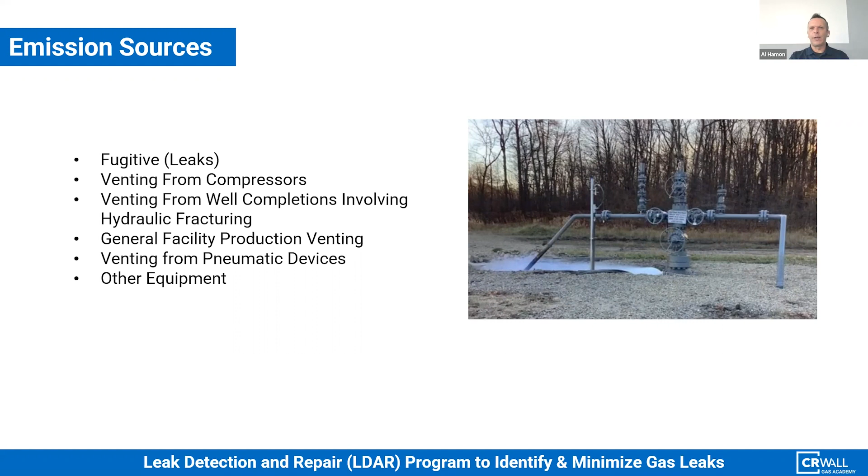Some common sources of fugitive emissions include compressor unit valves, relief valves, unit blowdowns, compressor packing, meter tubes, valve stems and fittings, fuel valves, various piping and vessel flanges, threaded connections, online gas analyzers, and pipeline damage.

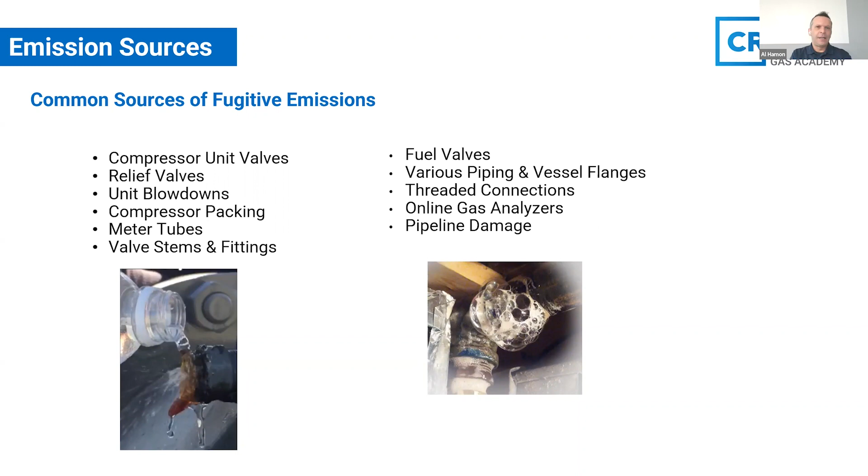What are some major causes of gas leakage? Corrosion, construction material defect, third-party damage, human error, or mechanical failure.

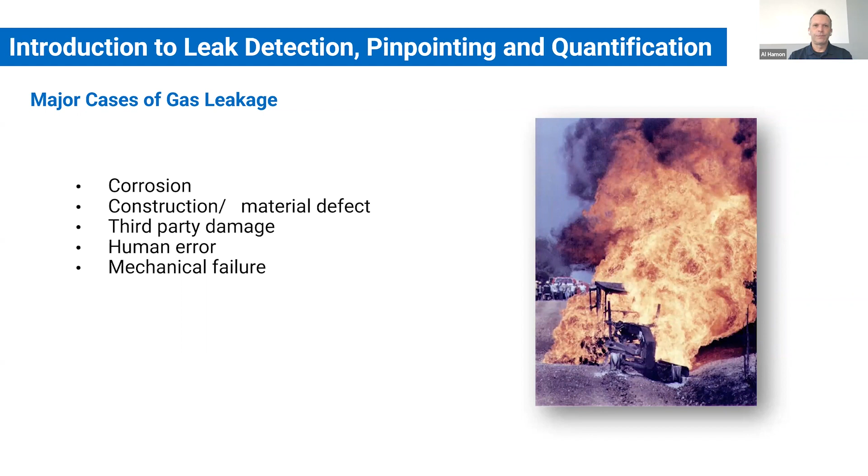What is the definition of leak detection, pinpointing, and quantification? Detection is identifying the existence of a gas leak. Pinpointing is identifying the source of the gas leak, or the actual position of the leak. Quantification is determination of concentration and/or emission rates.

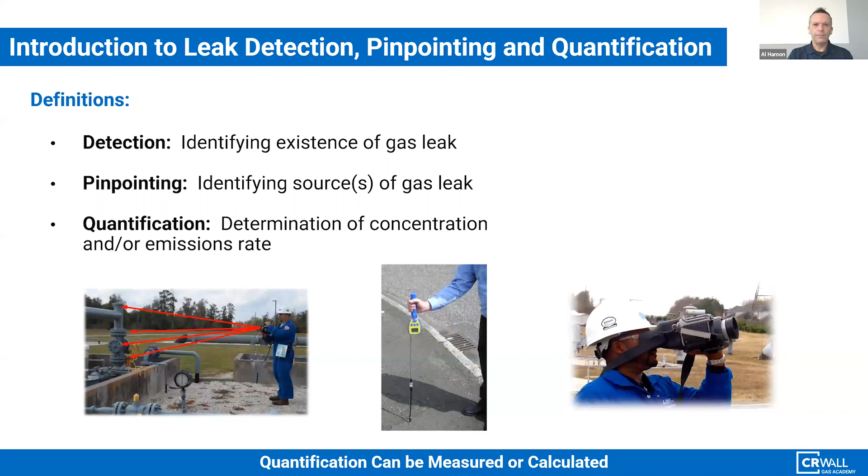What are the reasons for conducting a leak survey? It could be federal and provincial requirements, or industry stakeholders, with many stakeholders driving methods and practices—AGA, CSA Z662, AER Directive 60, EPA Method 21, TSSA, and the list goes on.

Reducing unaccounted for gas, system overview, budgeting funds where needed. Leak classification drives work and investment, reduces operating costs, odor complaints, callouts, and also affects public image.

What are some of the new drivers for leak survey beyond safety? Public image is one, along with third-party environmental oversight, watch groups, and fence line investigations. There's also a focus on corporate environmental, social, and governance goals, improvement in technology, and new regulations and LDAR strategies.

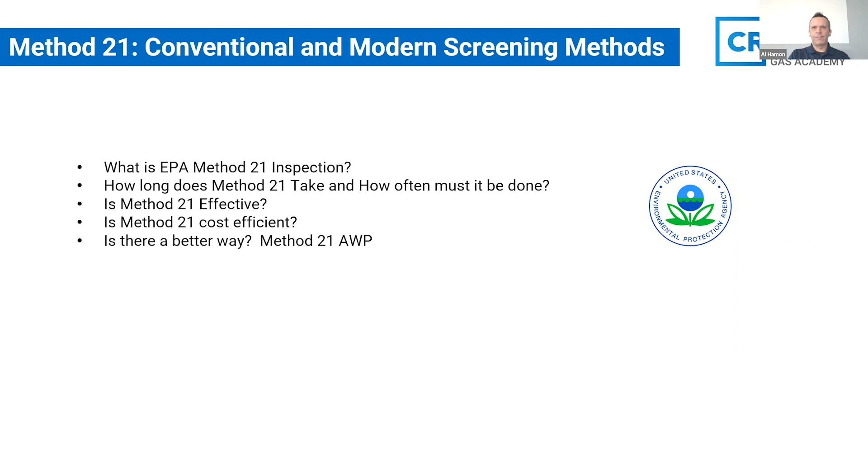So if we look at the two alternatives right now, Method 21: you're using conventional flame ionization or catalytic oxidation, thermal conductivity, and now infrared sensors or infrared controlled interference polarization. With the new Method 21 alternative work practice, AWP, we're adding optical gas imaging cameras, so passive infrared type technology. We're adding illuminated infrared laser detectors or remote methane leak detectors, which is considered active infrared, and spectrometers.

Now we're talking about Method 21. I mean, that's an EPA program, but we're talking about it because why? It drives a lot of practices and work definition here in Canada, correct? Yes. It's pretty much the standard. Method 21 is the standard as far as the type of instruments and the spec around those instruments that are approved, as well as the actual method. There are different guidelines when performing Method 21 that surround different types of leak points and how to approach them.

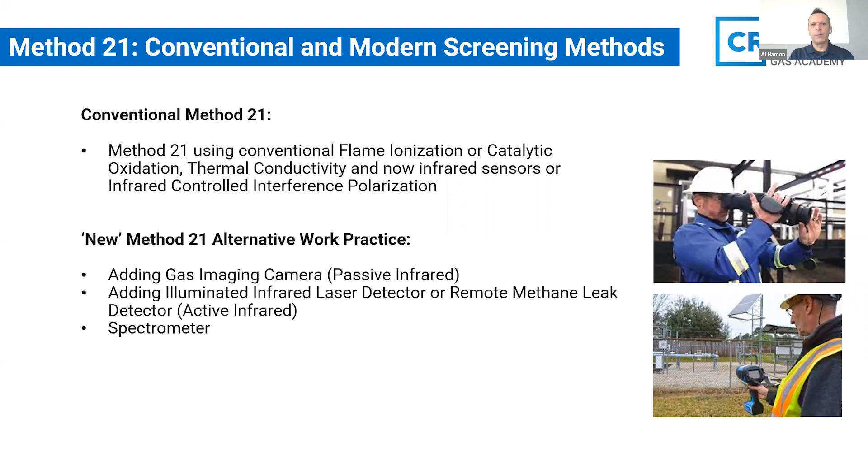Okay, so the main difference, if we look at these two, Method 21 versus an alternative work practice. Conventional Method 21, we'll call it, uses handheld monitors that detect ppm levels of VOC. They'll detect up to 100% gas as well. With the AWP, we're using optical gas imaging to detect a visible image of VOC leaks. This can be done at a remote distance versus conventional equipment where you're actually right at the leak source.

There might be some weather limits for both of them. High rain, wind, and humidity. For cameras, for OGIs, definitely rain, fog, wind, and extreme cold. Probably add snow to that last one as well, correct? Because of the background for the handheld laser devices.

Yes, so for laser devices, exactly, you need a nice reflective surface to get a proper reading with those devices. And as far as leak definition, conventional equipment will measure, they say, 500 to 10,000 ppm. That's a typical range for quantifying leaks, versus the optical gas imaging camera. It's a visual leak detection. So one gives you concentrations and the other gives you potentially emission rates as well, right?

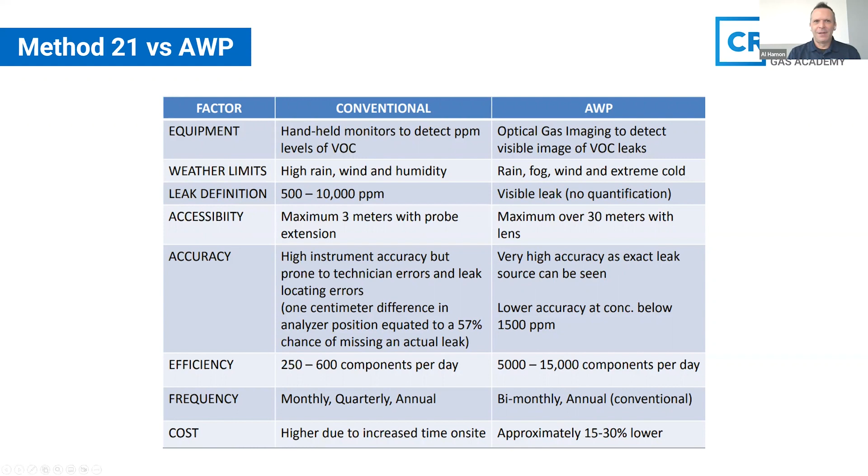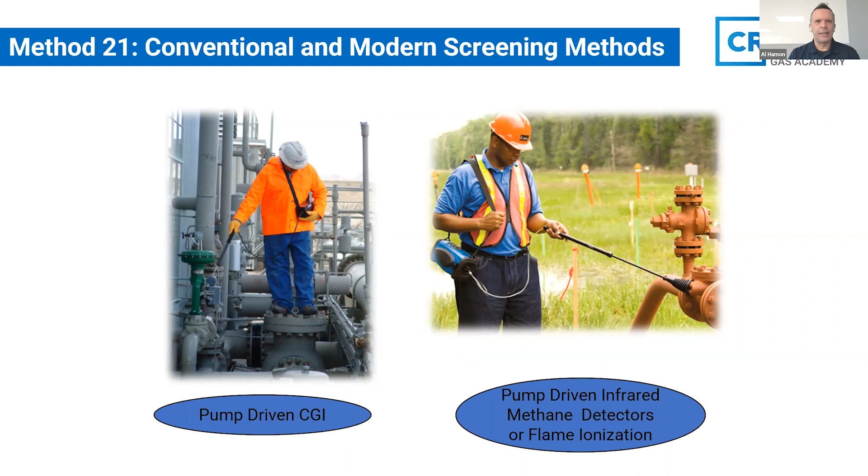So typical instrumentation you'd be using for the conventional method is CGI units, combustible gas indicators, like the GMI gas surveyor, which is a great example, or the DPIR from Heath. Both units have an onboard pump, and you're drawing a sample to verify the actual leak concentration, not the leak rate. Newer technology is the RMLD, laser-based detectors that can take measurements at a distance, as well as OGI instruments, optical gas imaging cameras.

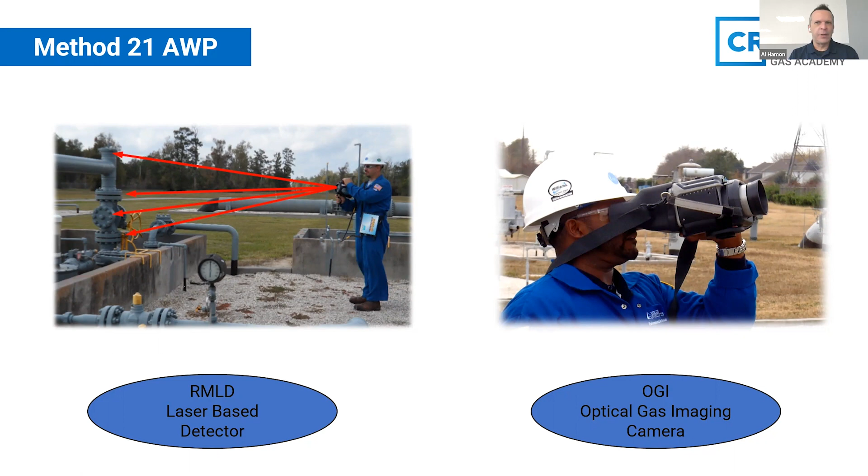So AWP, I don't know if I mentioned that, but its definition is alternative work practice. That's the evolution of the standard or conventional method 21. Yeah, exactly. And for our guests that haven't reviewed it, would encourage you to do so.

So some of the challenges, new approaches, best practices. So gas and leak detection culture, everyone is responsible for fugitive emissions reduction, mitigation, trend to leak quantification, increase focus on opportunistic leak detection versus planned scheduled work, AGA committee recommendations for gas filled occupancy, driving new best practices, and also new technology like optical gas imaging and laser methane detectors, driving new practices and benefits.

I just wanted to add to this, that first point I find quite fascinating. It is a real shift in philosophy or culture or strategy, if you will, around gas detection. We're seeing our customers, like many of you guys that are attending, your companies are now looking at everyone as possible opportunities to capture leak detection information data in the field. So more equipment in the field, more people trained to do so.

So this goes back to that opportunistic versus planned or scheduled work. When your teams are in the field now, even though it's not scheduled, you're doing a quick leak detection on the facilities potentially that you're working with or working on. So we've certainly seen that happen. Is that the same in the US, Roy? Yep. Yes. Okay. Same thing.

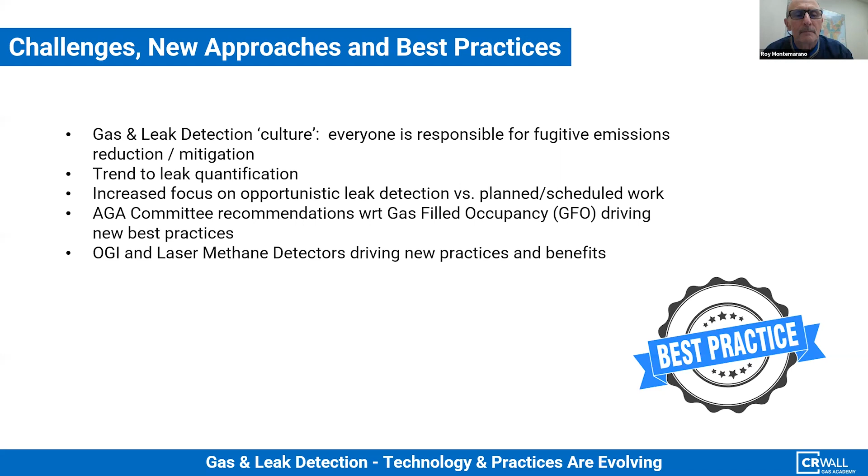You need to take your time. Yep. So for gas filled occupancies, let's talk about emergency response, protecting employees, first responders, and the public. Prepared by the AGA operations section, Safety and Occupational Health Committee. August 2022 was the latest revision. Recommendations above and beyond existing regulations. Committee identified 78 fatalities from GFO explosions.

Recommendations include use of handheld laser methane detection instrumentation to determine areas of exclusion before entering a structure, and new committee formed to evaluate all tech, including optical gas imaging. So as it was explained to me in very simple terms, field technicians, customer service operations personnel are now doing a remote scan using OGI or laser handheld devices of the facility's envelope, various leak points, windows,

looking for evidence of methane there before entering the building, because a lot of the standard practice is walking up to Madame's house and ringing the doorbell and going in that way. Now there's a preliminary scan, and that's the recommendation that looks like they're coming. And will be widely adopted, we expect. That's what we're hearing. Yep, especially first responders. It's the rule of thumb moving forward, right?

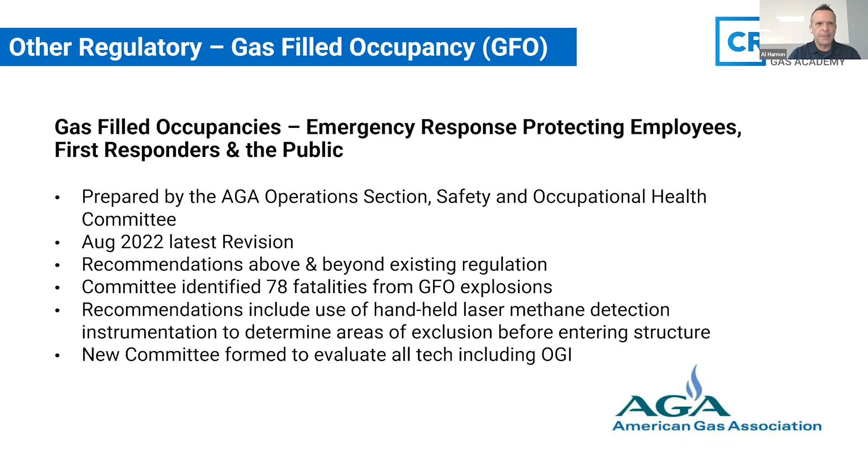So they're investing in these laser-based type technology to be able to verify areas before entering, or even before approaching closer to that specific area. So yes, we're seeing this increase now in the United States also, with the increase of laser detection to perform this particular function. Yes. Yeah.

So some of the approaches or technology that's readily available in the market right now. So again, your typical CGI combustible gas indicators. Some of you already use these. For example, the GMI 500 series first responders, GMI GS 700s, also high flow samplers, as line remote, line active infrared. So RMLD-CS as an example, and OGI, optical gas indicators, so cameras.

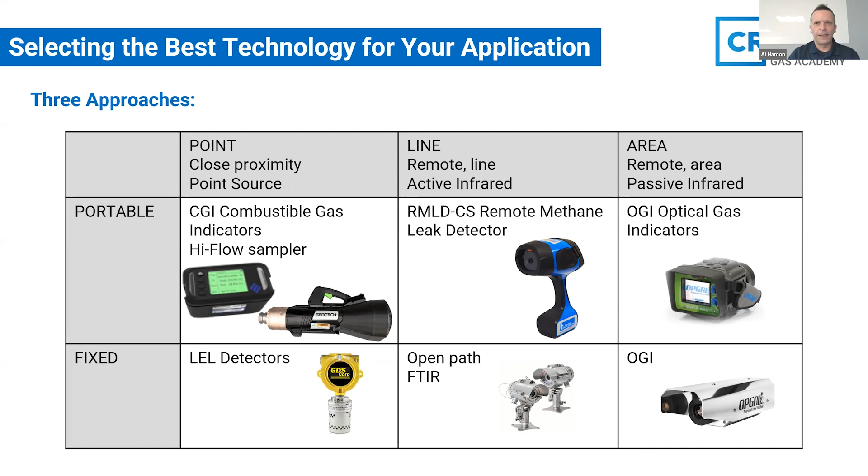There's also fixed options, so fixed gas detection, LEL detectors, open path IRs, and also optical cameras that are permanently mounted or fixed. So what is the difference between passive plume imaging, which would be the OGIs, versus active plume imaging? So for cameras, you're seeing the leak plume in real time. It expedites emission detection, simultaneously detect multiple sources.

Some limitations, so qualitative, not quantitative. Requires radiance difference between gas and background. This is what we're talking about, temperature. Some units are not intrinsically safe and require hot work permit. User experience and expertise developed over time.

Demonstrated fields of application. So all oil and gas facilities that emit VOCs, fugitive emissions, pipeline leak detection, and also these imaging cameras are used in aerial leak detection. So literally mounted on helicopters, airplanes, and now drones as well. As far as the laser-based type units, you'll detect leaks fast. It's very easy to operate, expedites emission detection. It's portable and mobile.

Built-in calibration to adjust laser drift. So this is a good point. There's actually built-in verification calibration in these units. Qualitative, not quantitative. Again, it is methane specific, requires a background within proximity to emission source. So this type of unit definitely requires some sort of reflective source, so the actual laser beam can bounce back to the unit to get a reading.

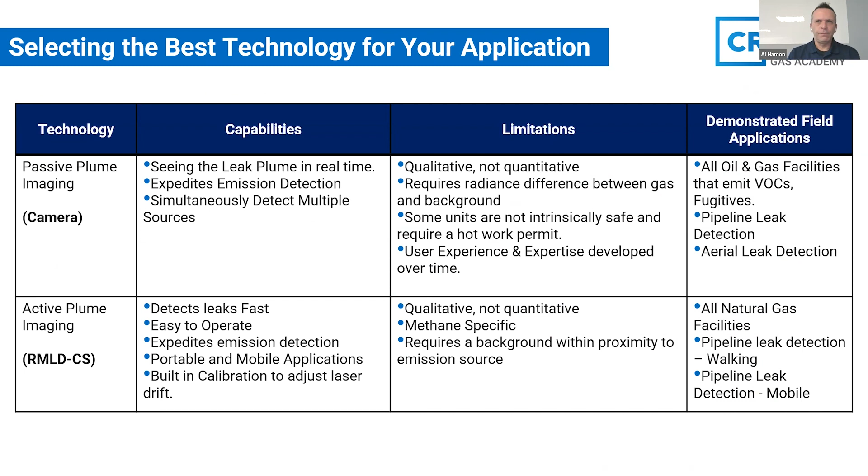So talking about the RMLDCS, detection distance is typically up to 100 feet, based on line of sight. So you need line of sight without having to get up close and personal. This is a great way to measure for leaks at a distance—especially in hard to access areas and safety issues. So no access areas, and just long distances, so you can actually cover a wide area in a much more efficient and quicker way than using conventional gas analyzers, as an example, or DPIRs.

So Roy, if I'm walking a pipeline, what's my battery life on this? With this particular battery, you're probably looking at 6 hours or more. It depends on usage—probably about 6 hours, no more than 8. And I believe it comes with a spare battery, Mike, so you do have a backup, and it's quick to swap in the field. Yes, very easy to swap in the field. Not everybody's working a full 8-hour day using this thing, because they're much more efficient at it.

So the way it works is the actual beam size—it's conical in shape, and typically about 22 inches at 100 feet. So it does get bigger at a distance. One of the good features, again, it's got a built-in daily self-check, so you're guaranteed it's properly operating as well as accurate. It's got internal data logging. And one of the great features as well, it's got an onboard camera, so it becomes a visual aspect too.

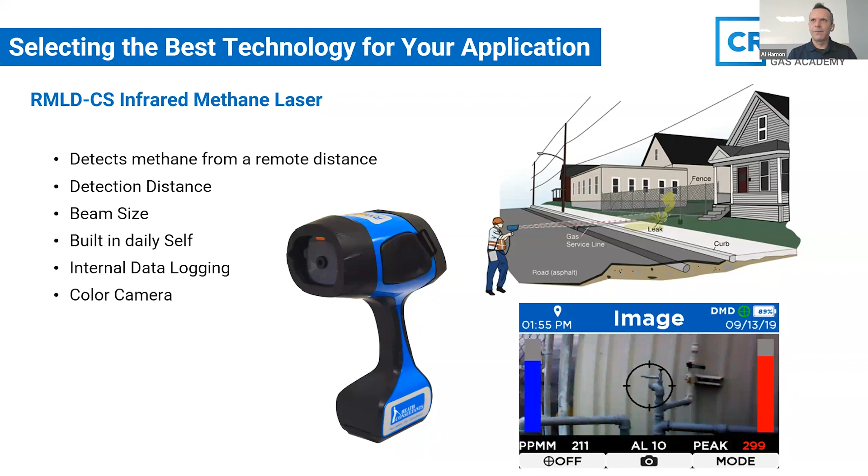Just to go back on that a little, Al. Go ahead. The data logging is actually taking a reading every 1/10 of a second. Oh, really? Okay, so just to give you that information. Wow, so that's a lot of data logging. Yes, it is.

So here's an example, this is the older version of the RMLD. We can see the difference, the advancement that Heath made, which is very incredible actually. This is what the newer one looks like versus the older technology, but this is the principle behind it: standing from one spot, you can measure different areas in a much quicker manner than actually physically going there taking a measurement with your gas surveyors.

So primarily it's a tool and best practice approach for leak detection on components: thread fittings, connectors, flanges, tube connectors, valve packings, unit unloaders. You'll find small leaks the fastest, allowing the operator to then view and isolate with a camera and record the event prior to quantifying it with maybe something like a high volume sampler.

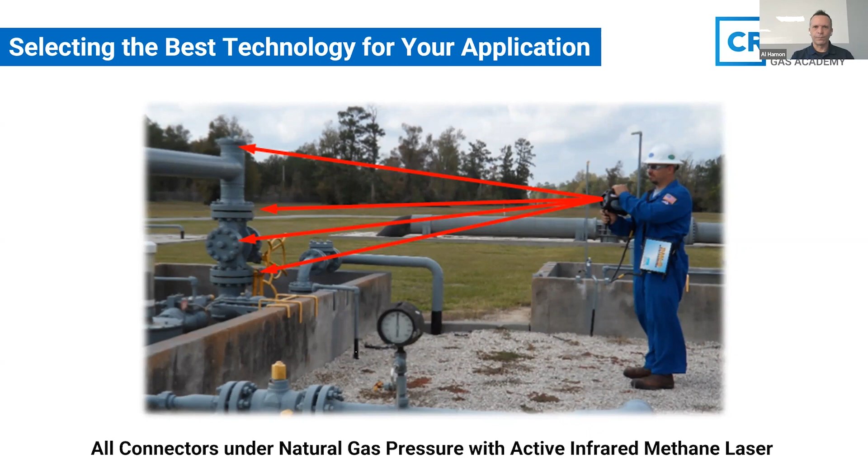Here's another example. Again, real-time detection of methane leaks from a nice distance, quicker identification and repair of leaks. You'll screen hundreds of components in an hour, literally, and screen inaccessible areas simply by viewing them. So if it's a no-access type area, it might be a fenced-in yard, there might be a dog there, there might be something. At least with this type of unit, you can take a measurement off a meter or what you need to measure without accessing that yard.

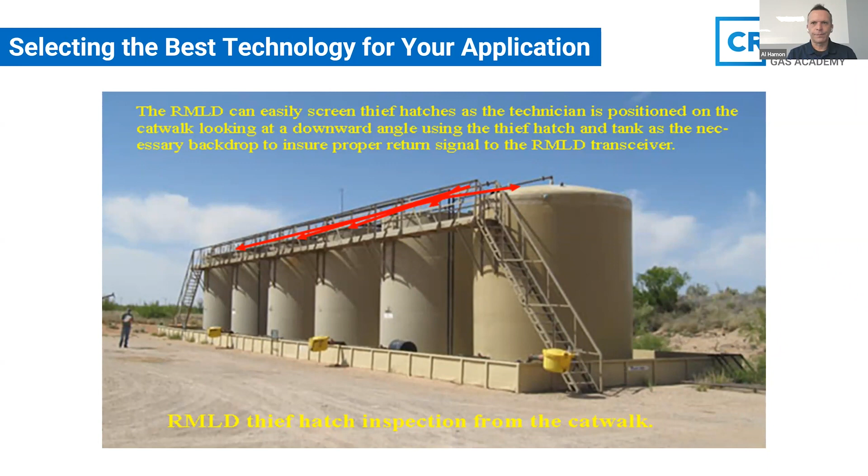Another product that Heath supplies and CR Wall is called the DPIR, which stands for Detecto Pak Infrared, a portable leak survey tool. It is the most advanced and accurate available. Some of the features: you've got Bluetooth connectivity that you can connect to GPS units as an example, providing S-gas readings along with GPS breadcrumb trails for walking surveys.

It's got an onboard pump in conjunction with infrared sensor technology. The DPIR is much more effective at finding underground leaks than laser-based detectors because it's drawing a sample. It's got a quick response time, and specific to methane, which is key for productivity with walking surveys. More efficiency at finding leaks with zero sensitivities to other hydrocarbons and less chance of missing smaller leaks when walking. So again, this unit is specific to methane.

So CGIs, combustible gas indicators, example GMI 500 series, 700 series. They're fully customizable to your needs. The newest generation of this gas surveyor is the 700, which offers many options: menus displayed on the actual display, sensor technology, and gases being detected. The newer generation, the GS700, now utilizes IR-based sensors versus the older gen, which utilizes combustion chambers, so you'll get a more stable and accurate reading out of the new gen.

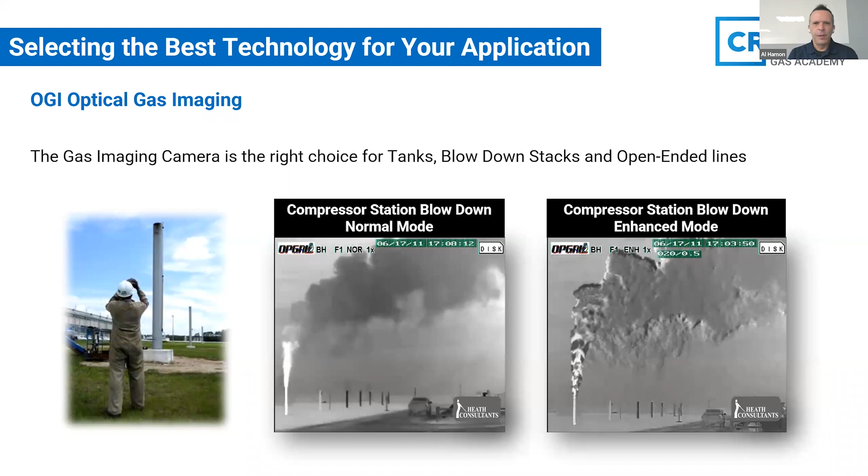Talking about quantification, OpGal has a full suite of software for quantification that works in conjunction with the EyeCGas camera. You capture that information in the field with your handheld, bring it back into your facility, and process it with the software for quantification. Correct, that's exactly how it works, and in my experience, the tests I've done in the past, it works really well. Also, I guess they said that software is free.

Oh really, wow, that's great news. You'd still probably have to buy their tablet though. No, you won't have to buy that tablet - I guess the software is free and it's supposed to be able to fit on any tablet now. Wow, that's a great update. I'd have to verify that, but I heard the software is free now. Yeah, because software for that kind of suite is typically pretty pricey, but at the end of the day the cost of ownership is minimal.

And that's for your quantification. Yep, so just a quick example here of different applications - optical versus something like the RMLD CS or RMLD. The CS is a newer version. Facility commissioning - both units, yes, and annual DI&M surveys. Open-ended lines - optical seems to be better. Obviously with the RMLD you need a backdrop. So again, they both have some challenges depending on the application.

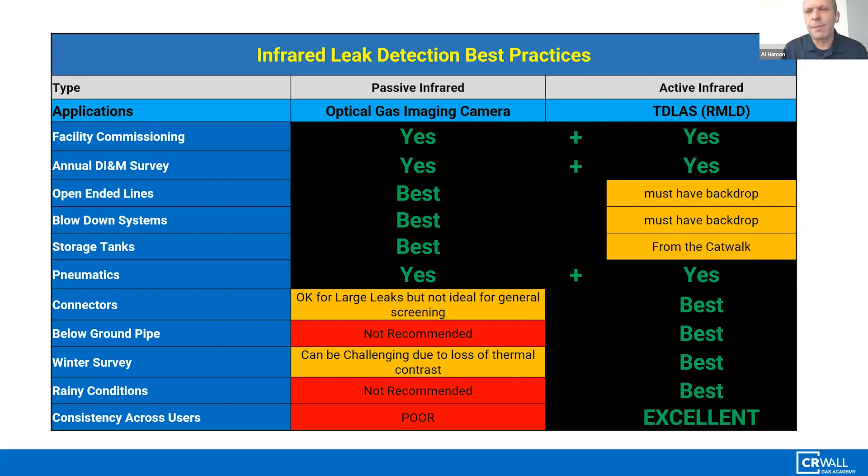So the next item is used to quantify leaks up to 25 CFM. This is quantifying the leak rate, not the concentration - more the leak rate. So it's concentration by volume, is that what this does? Yeah, exactly. They're portable, intrinsically safe, battery-powered units to determine a component's leak rate by sampling at high flow rate to capture all the gas leaking from the component along with a certain amount of surrounding air. By accurately measuring the flow rate of the sample stream and the natural gas concentration within the stream, the gas leak rate can be calculated using equation 1.

This is the type of equation you'd use with something like the Semtech unit. More advanced units actually do that calculation for you - you'll see your flow rate, you'll see your gas concentration, and then it does this calculation to give you your actual leak size.

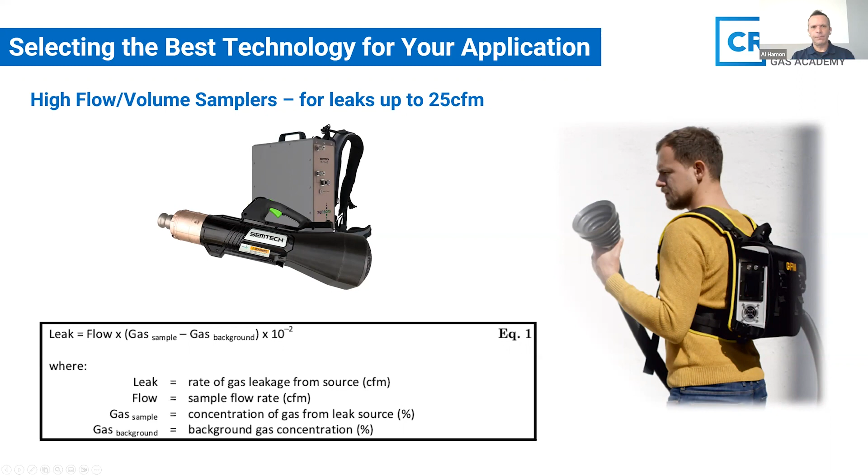Some of the benefits: total capture measures leak rate directly, with calculated accuracy typically plus or minus 5% of reading. You can do about 30 measurement points per hour typically.

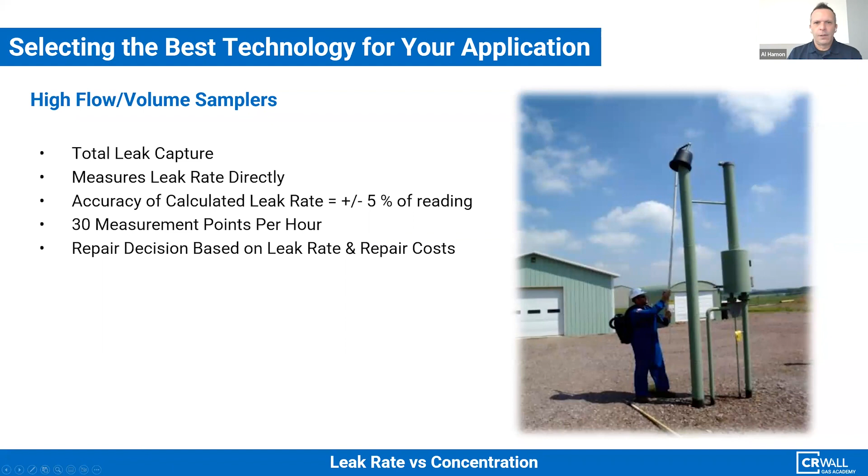And a repair decision based on leak rate and repair costs - that's another trend too, really, isn't it? Instead of historical classifications driving all investment decisions and scheduling for repairs, we're seeing leak rate or concentration by volume being used more and more to drive investment decisions and scheduling for repair.